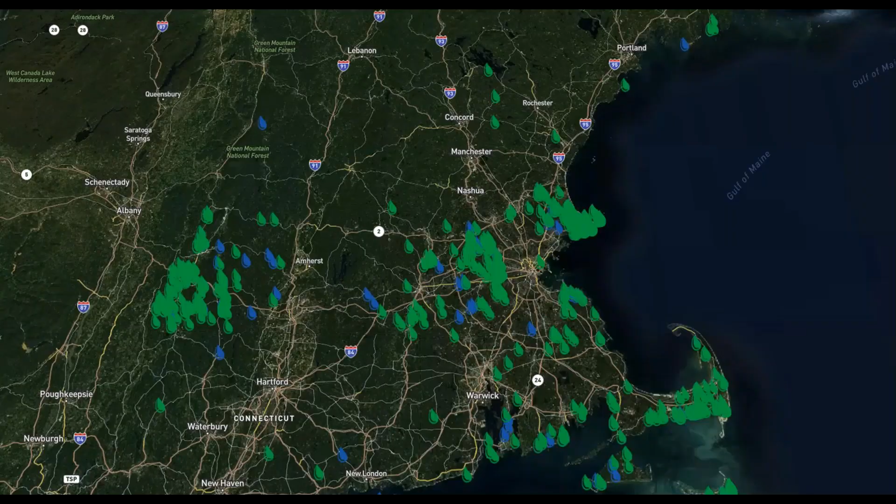On the map, let me go back for a second. If you click on one of those green dots, it'll bring you to these pages. You'll see a close-up of the site, and another box opens up that tells you when it was installed, the year, how many gallons per day it is, the level of effluent, and whether it's a primary effluent disposal system or has treatment, et cetera.

So it gives you a great snapshot of information if you'd like to learn about when these were installed, or if you'd like to look at other projects in Vermont, Massachusetts, or Maine. There are hundreds of them to look at and see why somebody may have chosen to use Perc-Rite there.

Let me talk to you about the history of Perc-Rite and how it came to be. In the 1970s, Middle Eastern countries had an issue with how to grow crops, since most of those countries are desert based. They worked through some things and came up with a process to pump treated wastewater from the cities, pipe it out to the desert, and irrigate crops through subsurface irrigation tubing. That's basically the genesis of how Perc-Rite came to be, using wastewater as a method of irrigation for agricultural purposes.

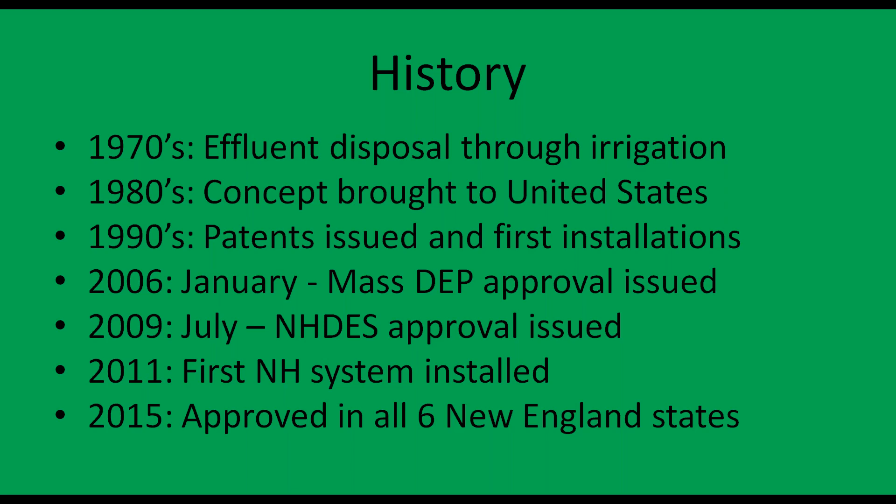Finally, the last state approval was issued in 2015, for the state of Connecticut, which has very, very different regulations than all of the other New England states. It seems like the other five New England states have more commonality, and Connecticut is a little bit different. So that took a little bit longer, and there's a lot more red tape for it to go through to issue that approval.

So the concept of Perc-Rite, we are equivalent to pressure distribution. So under your state code, whenever pressure distribution needs to be utilized, Perc-Rite can be an equivalent substitute. That's a very important concept to understand. We can discharge primary or treated effluent. It can be implemented for new construction or for failed systems, repairs, upgrades, etc.

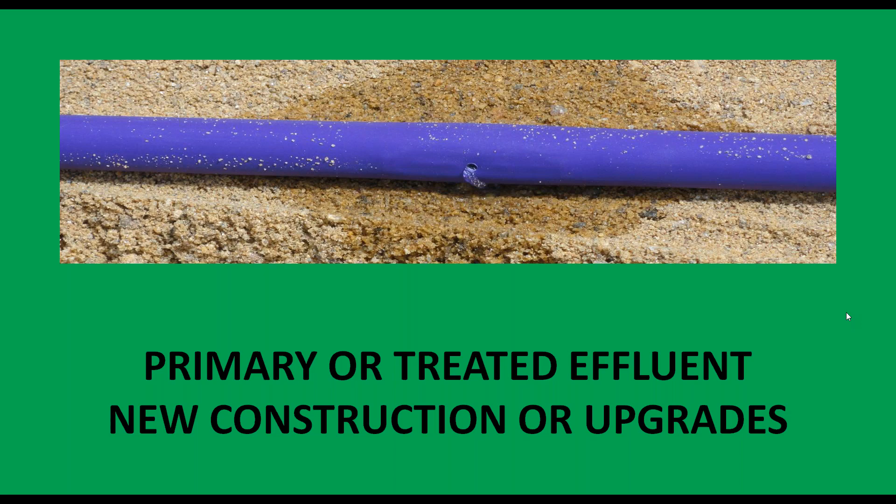Let's walk you through a plan view of this. So we have a home that's discharging waste into a primary tank. It can be either a septic tank or an aerobic treatment unit. It carries over into a separate pump chamber. In that pump chamber is a Perc-Rite supplied pump. It pumps through a force main into a device called a hydraulic unit.

We'll go over what that does more specifically throughout the presentation. The hydraulic unit is just a pass-through. So the pump is back here, and this provides some other aspects of our system. Once it passes through the hydraulic unit, through a zone supply force main, through a zone supply manifold, it feeds a series of interconnected pieces of drip dispersal tubing.

And then what's quite different is that we collect the wastewater through a return manifold, and it gets piped back to the hydraulic unit through a return force main. At that point in the hydraulic unit, it typically just deadheads, it stops there. So now the system is on, it's pumping and it's dripping. That collection point, it just stops.

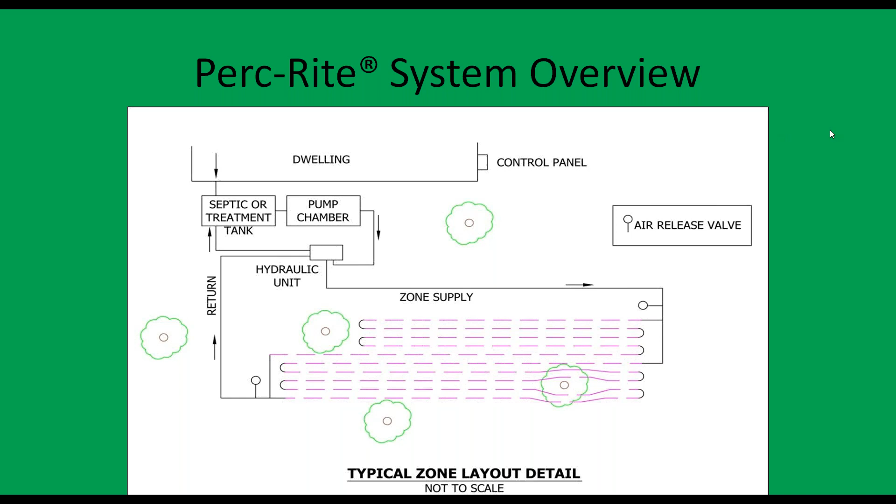So there's our septic tank or treatment tank, carries over to the pump chamber. We have the hydraulic unit. We have that force main that feeds the hydraulic unit through the Perc-Rite supplied pump. We have the supply force main and the supply manifold. We have the return line and the return manifold. We have the gravity return line that brings it back into the inlet of your primary tank. We have the control panel, which controls the whole operation.

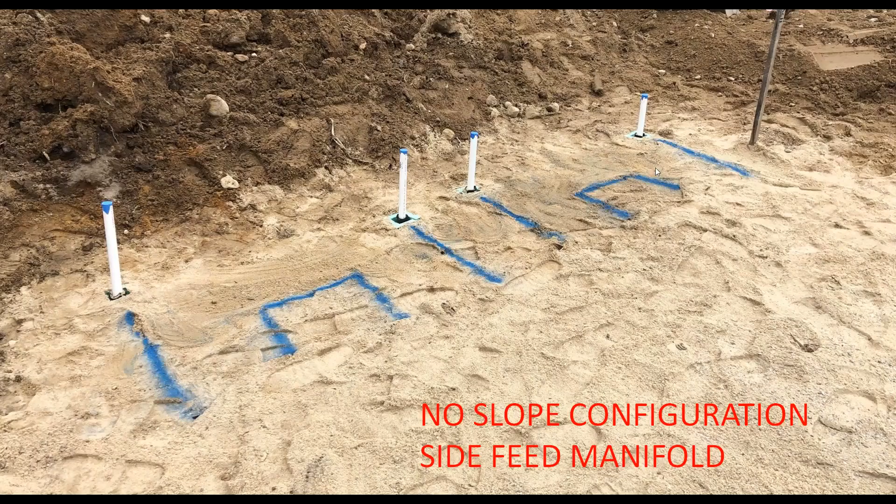In order to achieve balance throughout that zone of tubing, a manifold is built, as we showed in the depiction before. This type of manifold, which we call the side feed manifold, is very similar to your traditional pressure distribution type system. We'll have a force main below grade, horizontal pipes below frost depth that tee or elbow up and feed your lateral pipes. That's the same case here for Perc-Rite.

Flat sites will get this type of configuration. You'll notice we have an insulation barrier for our pipes that go up. That really helps protect the system for year-round operation, because these vertical risers will be charged. The drip tubing is not, so anything in this insulation box will be charged. When the system gets turned on, it's instantaneous pressurization.

These little painted-in sections represent the loop connections. Every line here, and there are 8 of them, will be a run of drip dispersal tubing. These are your loops. Because there's a supply and a return manifold, it'll alternate a supply feed here, a return here, a supply feed here, a return here. So it's broken up into two uniform laterals that provide a good pressure base into that tubing to keep it in the range specified.

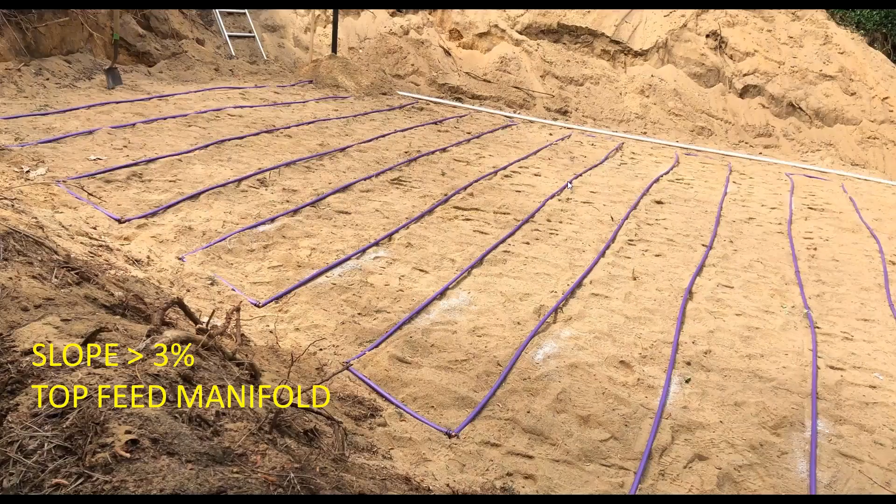What's really unique about Perc-Rite, and what helps us a lot on challenging sites, is the ability to build drip dispersal zones on quite steep slopes. There is no maximum slope for which the system will not operate. Some state codes set maximum slopes, saying you can't build on more than a 30% grade, or heavy equipment sometimes is difficult to operate on steep grades. But Perc-Rite can often be built on steep grades by hand, casting the material from below to make it work.

In this example, we have a pretty good slope. The pump chamber is further away at the toe of the slope. So you'd imagine the pressure closer to the pump, lower in elevation, would be greater than the pressure further away from the pump and higher in elevation. And of course, the answer is yes. But because of the pressure compensating emitters, the pressure up here may be 20 pounds and the pressure down here may be 40 pounds, yet you're getting the exact same application rate throughout the entire network of tubing.

Many of you design systems, I know we have a lot of designers because we did the poll. For those who have designed pressure distribution systems on a slope before, it is a nightmare. There'd be ball valves at each of the laterals, perhaps different orifice spacing and sizing, so your squirt test requires a lot of adjustments just to make it all work. Not with Perc-Rite, it's pre-engineered. The pressure compensating emitters take care of all that, and you get uniform application throughout the entire zone.

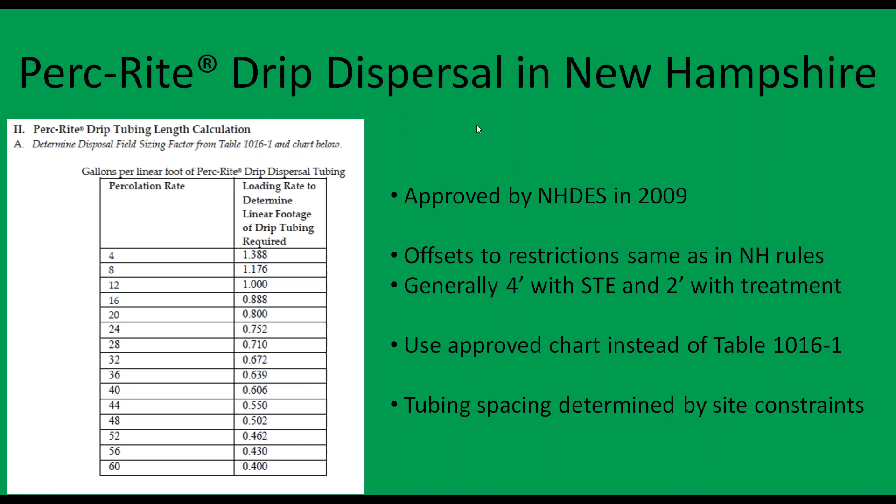So how to size the field. We are going to calculate the amount of tubing through that chart you just saw, and then we're going to figure out our installation method.

If you needed to use a sand bed, let's say there was unsuitable material or high groundwater forced you to be above grade, we can place the tubing 1 foot on center. So your linear foot to square foot ratio is 1:1. So if you needed 450 linear feet of drip dispersal tubing, you can build that in 450 square feet.

Now another example: let's say your groundwater was deep enough and your native soils were acceptable, so you didn't have to remove anything, but you wanted to work around trees, and your site was big enough that you didn't have to squeeze it into a minimal area. So maybe we put a piece of tubing on one side of a tree, go 2.5, 3 feet over, put another piece of tubing, then maybe go 1 foot for a couple of runs, working around a few trees. The overall result may be a footprint a little bit bigger than what the bare minimum under the code would require, but because we did not need to strip out material and import sand, it's okay.

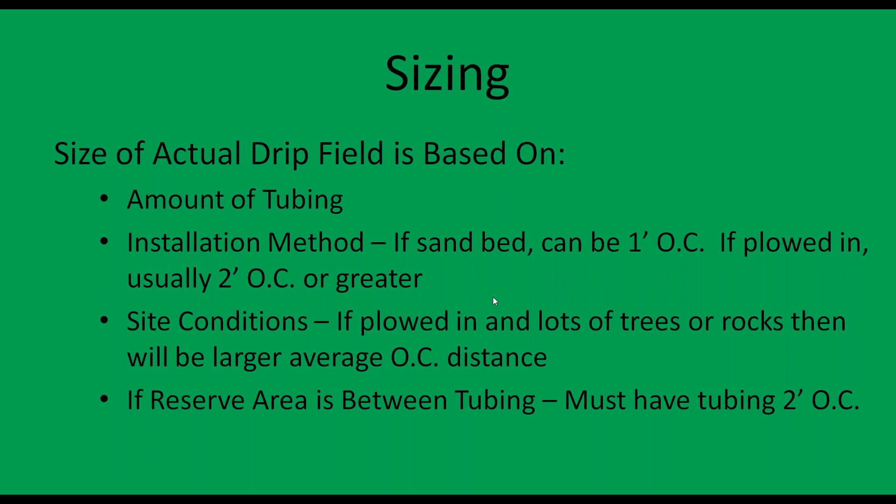So that is design criteria. We'll walk you through a real system later on, but we wanted to go a little bit more in depth about how this all comes together.

So a residential design, how do we help you? This is your first time considering using Perc-Rite Drip Dispersal, so how are you going to pull this off? Are you going to be a lone wolf, or are you going to have support? You're going to have as much support as you desire. As I mentioned, we have our New Hampshire design manual attached to this presentation. If you really want to read and learn about how to design a Perc-Rite system in detail, you can do so through the manual.

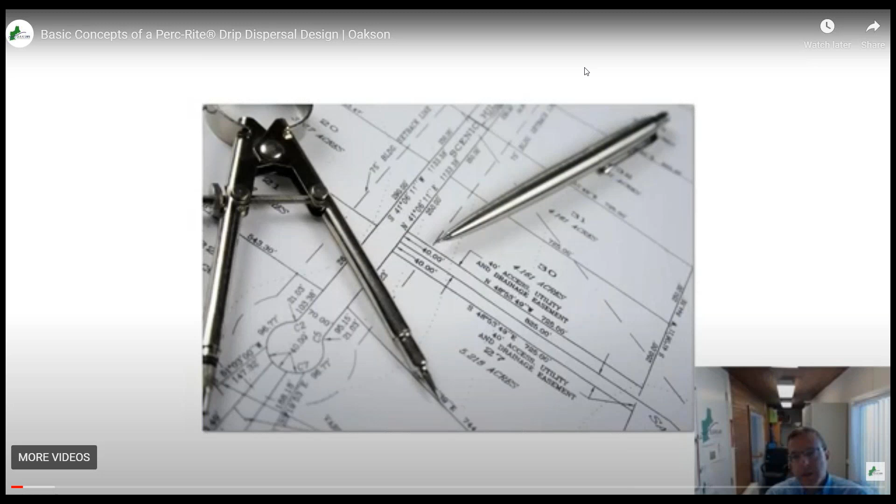But in today's world, YouTube is a great source to learn how to do things. I just fixed my clothes dryer last week—I couldn't get a repair guy out, so I said let me figure this out. I went on YouTube, found a video, and within 2 hours I was back in business. Same thing here: Oakson has a YouTube channel, and in that channel there are videos to teach you how to design a system in detail. So we'll walk you through the process. I'm a much better learner now through video than through reading lengthy technical manuals, so that's an option for you as well.

Coupled with those videos on our website and YouTube channel are all of the aspects of a design that you will need. I know some of you on this presentation work in Maine and Massachusetts - those manuals and approvals are on our website. There is a written installation guide, but there are better YouTube installation videos available, and I'll walk you through one of those later on. All of the AutoCAD details you would need to accompany your site plan are available, along with some in-depth questions that might help you get to solutions.

And then lastly, there is a design calculator tool - if you have a more typical rectangular shaped system, you can put in your length and width, and it'll spit out the exact manifold you will need to build the system. So there's a lot of resources available to you.

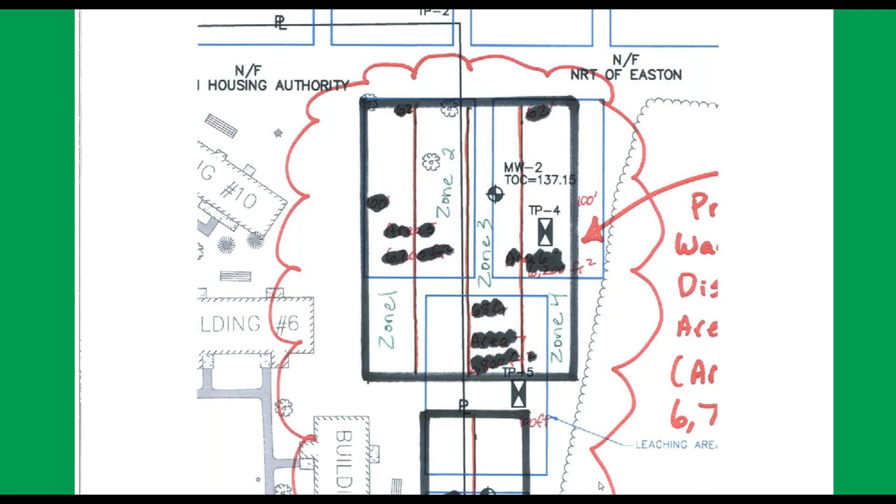But if you choose to forego all those resources and want to work with me directly for your design, please do so - I enjoy that interaction. So you might send me a somewhat crude sketch because you don't have a developed site plan yet, and say, 'Hey Rob, I got this area, it's about 375 square feet, we have a dwelling or a garage over here, we got this, we got that - what can we do there?'

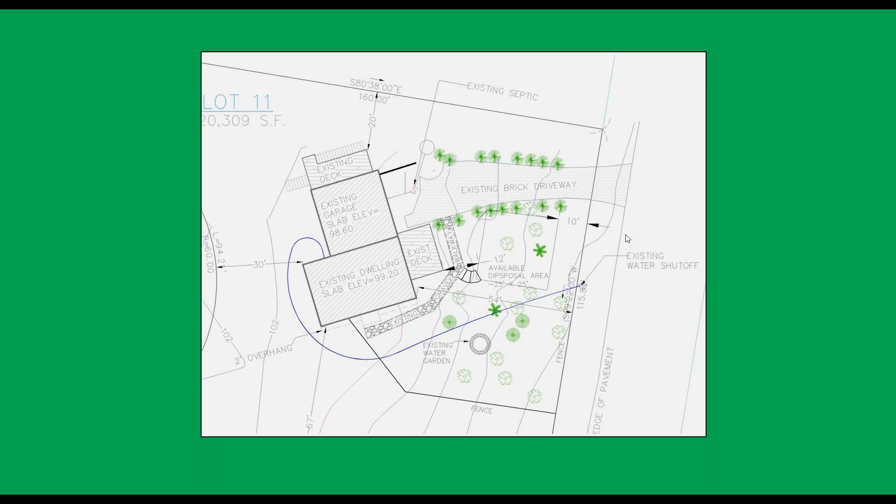Or maybe you have something a little more detailed: 'Rob, we have this house, a beautiful deck, a brick driveway, a lot of trees, a nice walkway. We have to stay away from this water line. I only have this very small area. There are some trees we want to keep, there is some slope - what can we do? Is Perc-Rite a possibility here?' And I'll work with you during those circumstances.

But what I found is the best way - if you're a little further along, maybe you've worked on another solution on a site, and that solution is causing you heartburn because it isn't going to look good, or it's going to be really expensive because you need a huge retaining wall - is to send me existing conditions, your design calculations, your plan intent, things you've already worked on, plus some tank locations and a potential field layout. I can work with you and give you back an exact Perc-Rite layout for those circumstances.

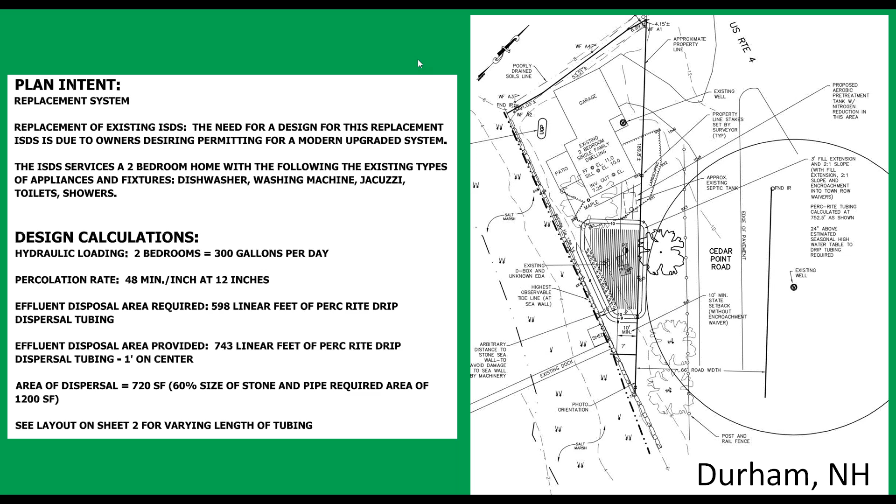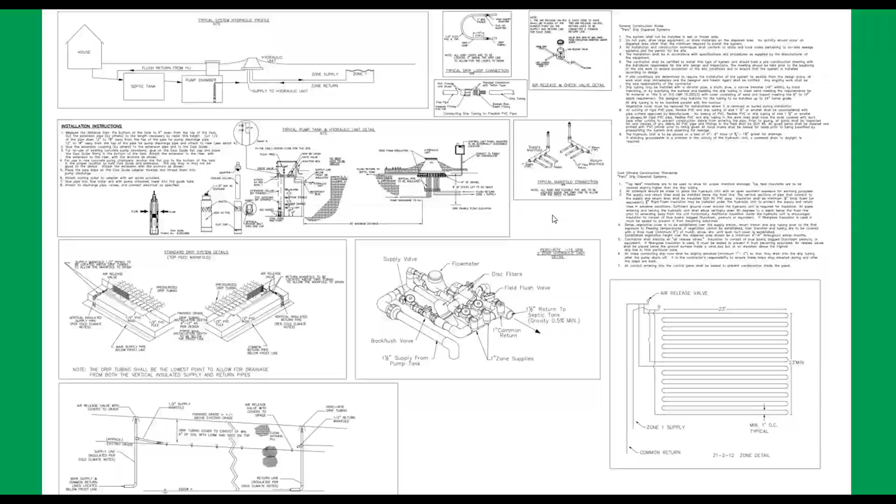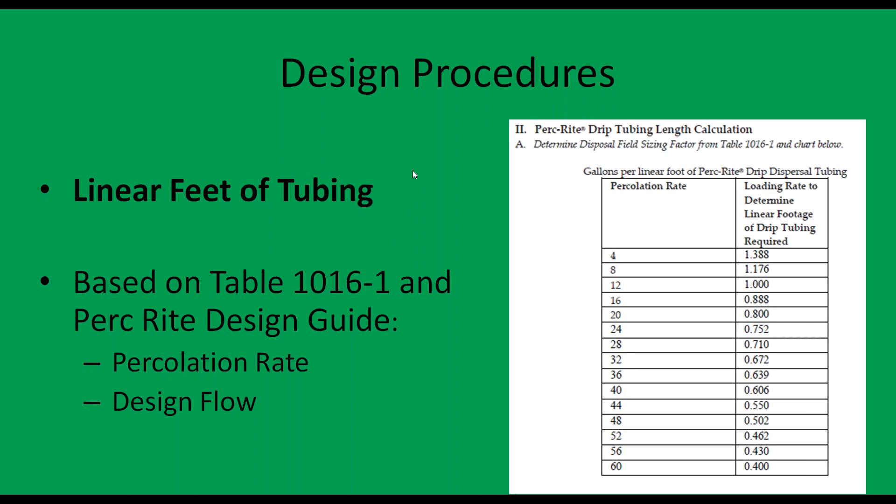So let's talk about some of the design criteria. Here is our chart - we are calculating linear feet of tubing, not area, based on your perc rate and your design flow. Just plug it into this chart and it'll give you a multiplier in order to come up with that linear feet of tubing. That is pretty much what we're going to talk about for design - this is only a 2-hour presentation, so I can't go into too much detail, otherwise we won't be able to touch all of the topics.

So a good question just came in about design. Talking about perc tests, if the tubing is only 8 inches in the ground, then where do you do your perc test? Great question.

The answer is that when you're designing a system, you need to design it based on the most restrictive layer. If your most restrictive layer is deeper down and you want to do your perc test, say in the C layer, while the A and B layers are less restrictive, then with Perc-Rite you'd be able to maintain that and do it shallow. If your A and B layer is more restrictive, you need to be a little more creative—you may have a shallow perc test, or you may be perking through a couple of different layers, and you'd need to work through that with your regulatory official. It's a little unique in that aspect.

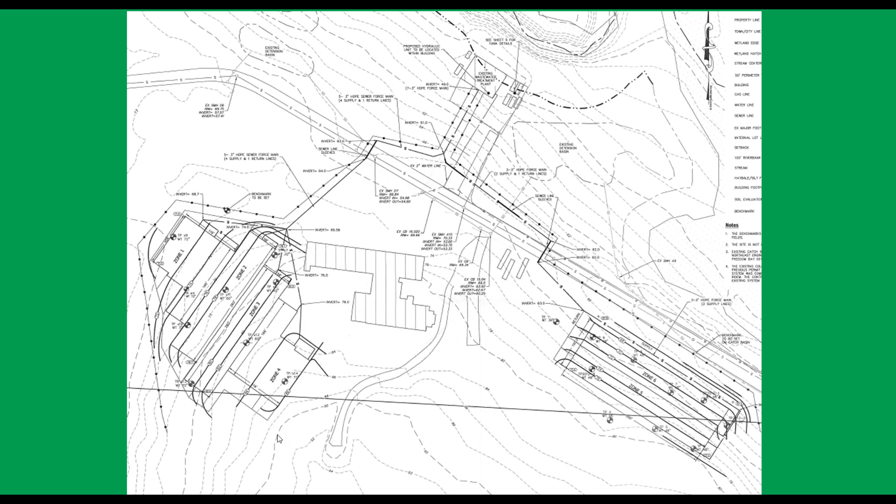Here's an example of a large residential subdivision in Rhode Island where they had a treatment plant and pockets of good soils throughout the site. You see a lot of jogs here, because they were avoiding bad pockets of soil. So we had a very unique zone layout—not a problem, because we'll provide all the custom details needed for your site.

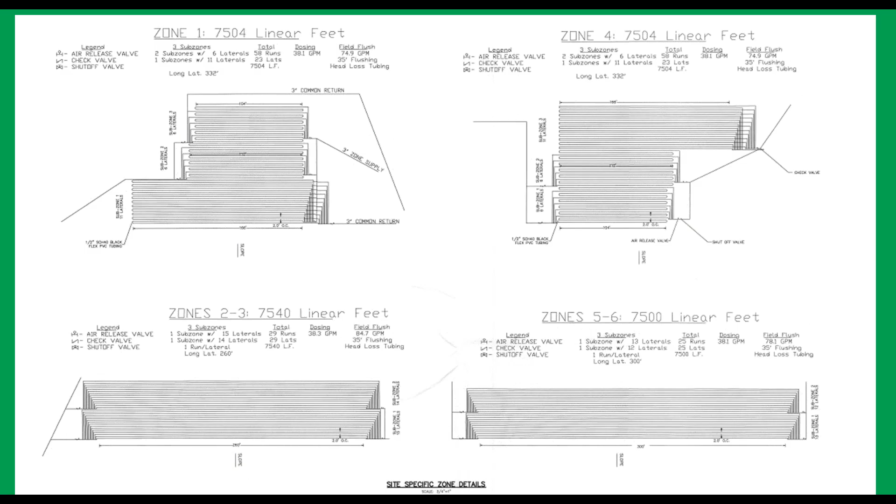Anything you need as an engineer, we will work and give to you. Most importantly, with these details, you'll need to size your pump and force main—we're going to give you all that information: the zone layouts, what your pump needs to be, how many runs in a zone, the force main size, how many minutes per day the system needs to run, all of the factors.

This is just one little snippet of a 5-page report we're going to give you that shows how we came up with our design. You can make sure our math is correct, but you don't have to go through that process—we'll give it to you. We'll give you the answers to the test, and then you can just read through the questions and make sure you agree with our answers.

If you're a regulator—and there weren't any on today—this is important to know: there may be a regulator who has no idea what Perc-Rite is. So as a designer turning in a plan to somebody who says, 'what is this, I don't even know what to do here'—not a problem. Encourage your regulators to reach out to us, and we can provide them all the information they need to review their plan.

We can also review it with them. I've been known, pre-COVID, to go to offices and sit down, roll out the plans, and walk them through the approvals, show them everything, and make sure they're comfortable. We've been to meetings before. We do a lot to make sure everybody is comfortable and understands how the technology works, and that it really is just a more protective, pressure distribution type system.

It's important to differentiate roles. What does Oakson do for every installation project, and what does the site contractor do? Oakson works with the site contractor to plan things out. We review plans with them and provide a list of parts that we supply, like I talked about during the rendering.

We also give them a list of items they need to supply, basically the Schedule 40 pipe. We'll even give them takeoffs of that so they have a good understanding and don't have to think it through too much. We give them the electrical schematics for the project, and links to our YouTube channel so they can watch an actual installation in depth. They'll feel a lot more comfortable after watching the video than trying to figure it out from the plan, believe me.

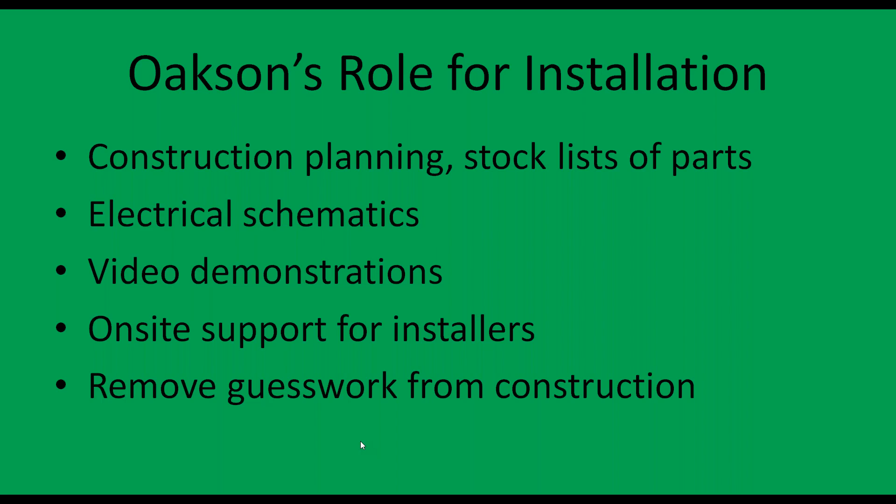We provide a technician to go to every single one of our installations, so there will be an Oakson technician present during installation of our components. The goal is to remove the guesswork from the construction process. We want the contractor to be confident in the bid they put out, and confident that when we say we can build this in less than one day, as long as they follow our lead, that will hold true.

The contractor will supply and install all the tanks, as I mentioned already. They're going to prepare the drip dispersal area. If it's a sand bed, they'll do the excavation and scarifying and bring in the sand bed, raked out and ready to go before we arrive. If it's a plowed-in installation, they might flag or stake the area, or paint contour lines to get ready.

They'll provide all the pipe and work alongside us. Oakson is not the contractor of record, we do not pull permits, but we work alongside the contractor. What I say is, we're in the same trench as the contractor installing our components.

The contractor is responsible for securing an electrician, whether it's their own person or someone the homeowner wants to use, and having them ready for the day of installation. The contractor is also responsible for backfilling all components following the given procedures, and for working with the engineer and homeowner to ensure compliance documents are taken care of. Oakson doesn't deal directly with compliance documents other than issuing a letter of certification.

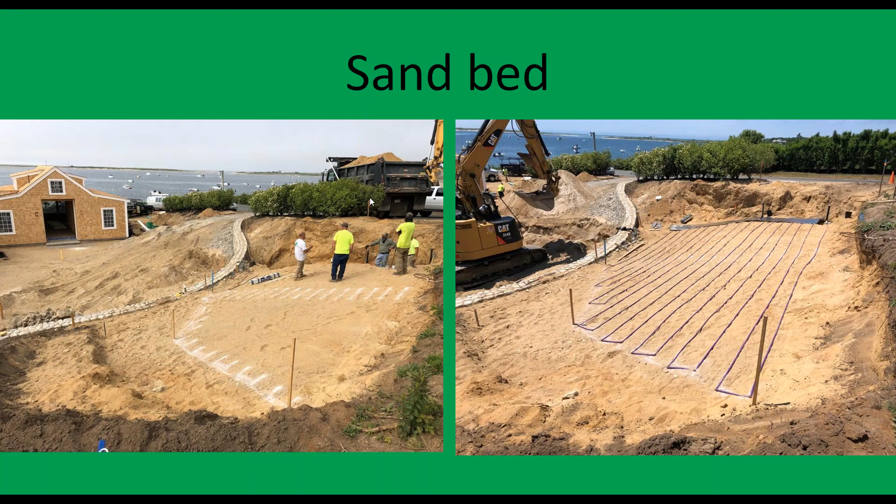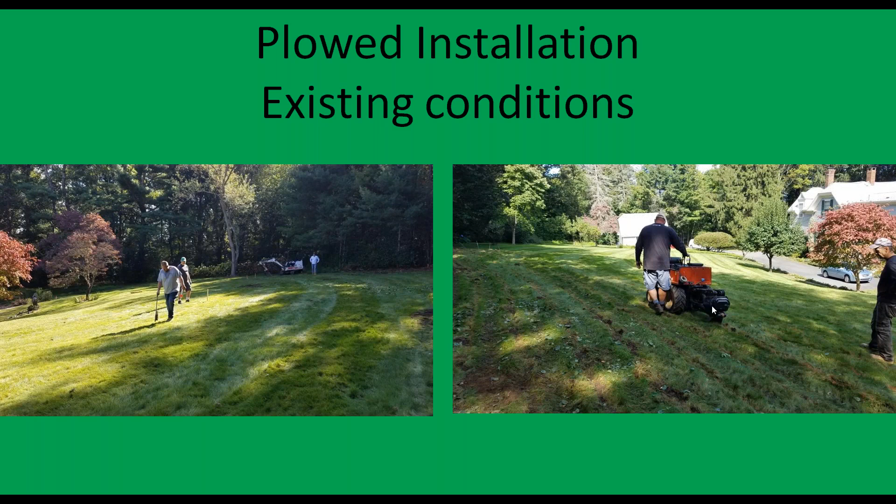So the contractor had his laser level and walked along, and every place he heard a beep, he made a little paint mark, then went back and painted the lines through. You can see some of the lines here to the right in the machine plowing the drip dispersal tubing into the existing grade. At the far end, the little pigtails of tubing are sticking out. We'll see some better pictures later on, but the operator is following the contour, pulling the tubing in at the desired depth that was specified on the site plan.

So we've come up with a process where the tubing elevation is specified on the plan, and then additional sand, say 6 inches, a sand blanket or sand envelope, is put over that elevation. So your tubing elevation is 100, the sand blanket is 100.5. Now that ditch witch can pull the tubing in at a depth of 6 inches below grade, and all the tubing is covered. Now a skid steer or track machine can drive over the sand and spread the topsoil very efficiently. I'm not worried about the load over the tubing.

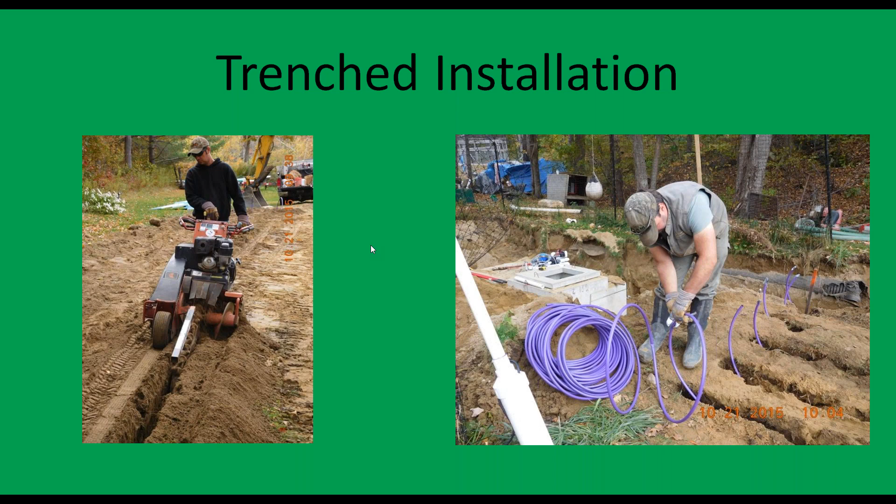The last example is the most unique and, to be honest, the most time consuming. You have a homeowner who does not want to lose a single sapling, move a rock, move a semi-mature tree, or move a tree that's kind of falling down a little bit, although this last run of tubing won't impact it. So they hired the contractor to hand trench with narrow shovels, just wide enough, going around all the obstacles, and then lay the tubing in these trenches.

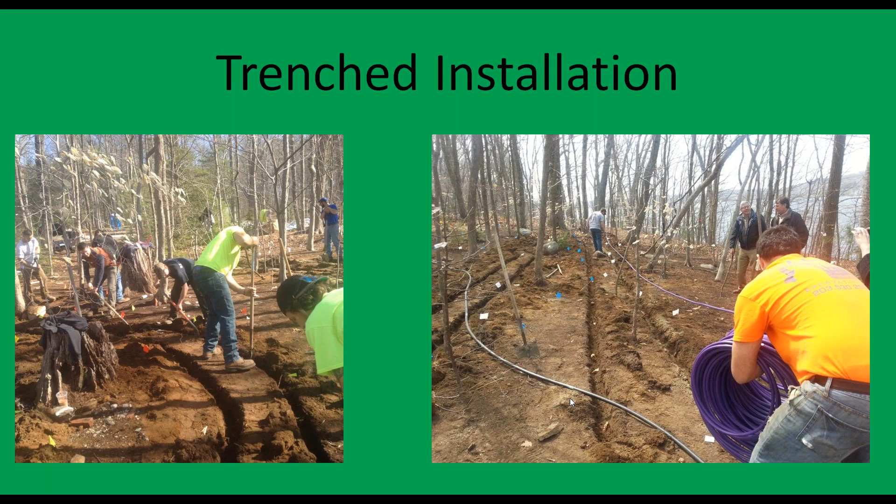It's very labor intensive, but the result is you have all of the leaf litter that they blew off to get started. Hand trenched, put the tubing in, raked the material over, made all the manifold connections, blew the leaves back, and you would never know a wastewater system is installed at this property.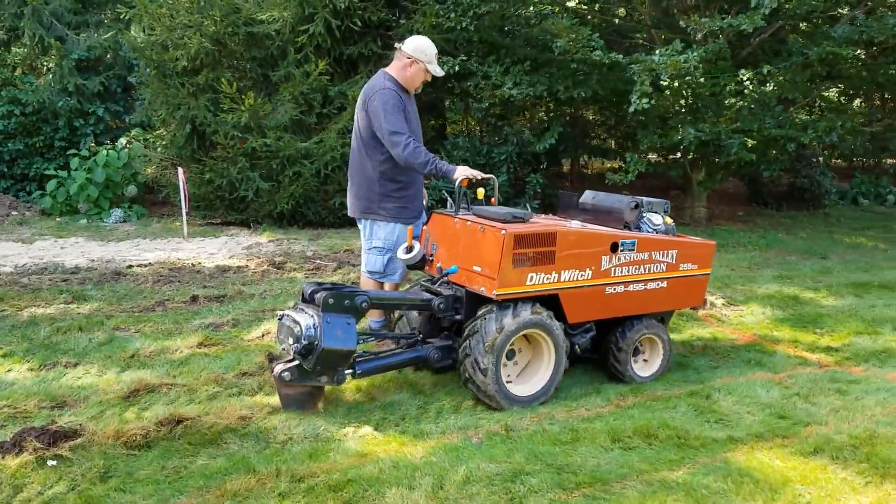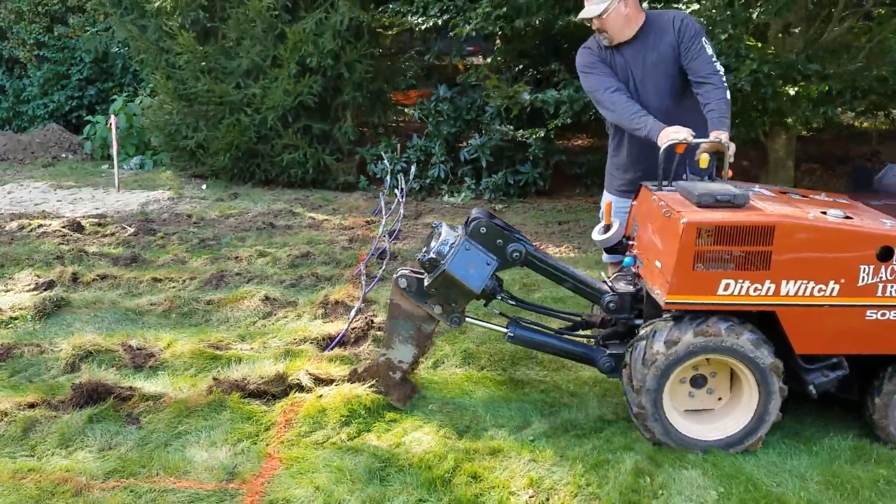Here's that same site where we're pulling the tubing into the lawn. You can see the paint marks for the next runs that the contractor painted out. Here's the operator getting to the end of the line. He's going to bring the blade up, cut off the end, and you'll have the pigtail there. They'll be looped together later on and connected into the manifolds.

Here is an example of the tubing being pulled in for a large commercial system. You can faintly see a string line along the track, which allows the installer to pull it straight. As they get to the end, the string line's connected to the stake, and then they just move the string to the next stake and pull the next line.

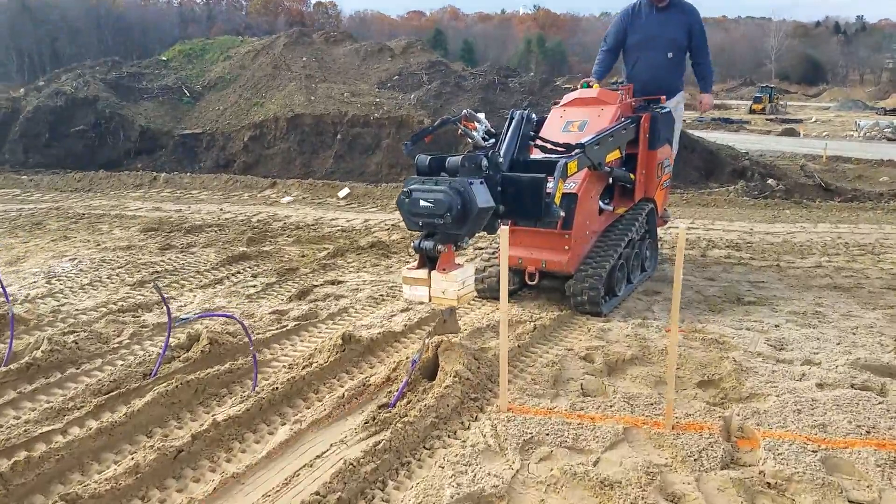A lot of these videos are sped up so we're not sitting here for 10 minutes watching it plod along, but you get the idea. He reaches the end, cuts it out, and then you're all set.

Here is an installation video captured by a drone. Again, we're speeding up the video so you don't have to endure many minutes of this monotony. The contractor makes it to the end, pulls up, cuts the line, then drives off and goes back to the other end. As he's driving off, you can see the guys over to the left. They're moving the stakes, moving the string, and the one guy on his knees is actually making the loop connection as everything gets set up.

This was a system of 6,000 gallons per day for a residential cluster. All of the tubing and all of the loop connections were pulled in and done in 5 hours with basically 3 or 4 guys — really quick, really efficient. So here they are connecting again to the coil of tubing and starting the process again.

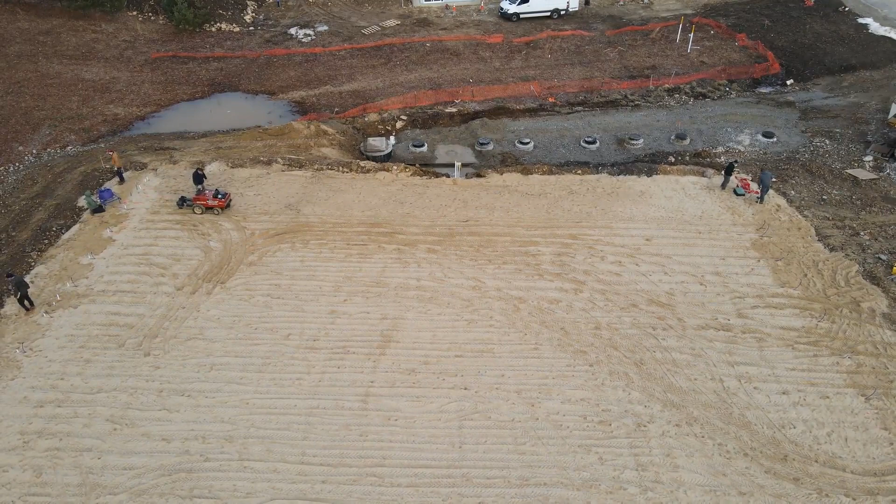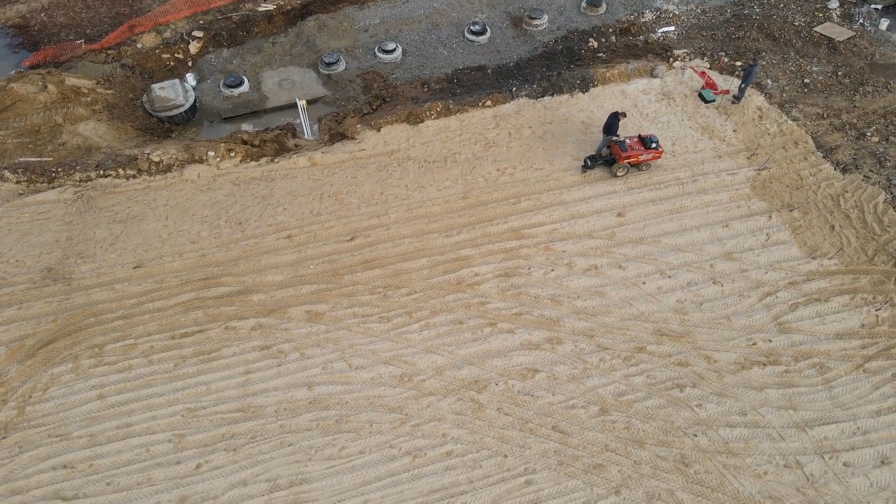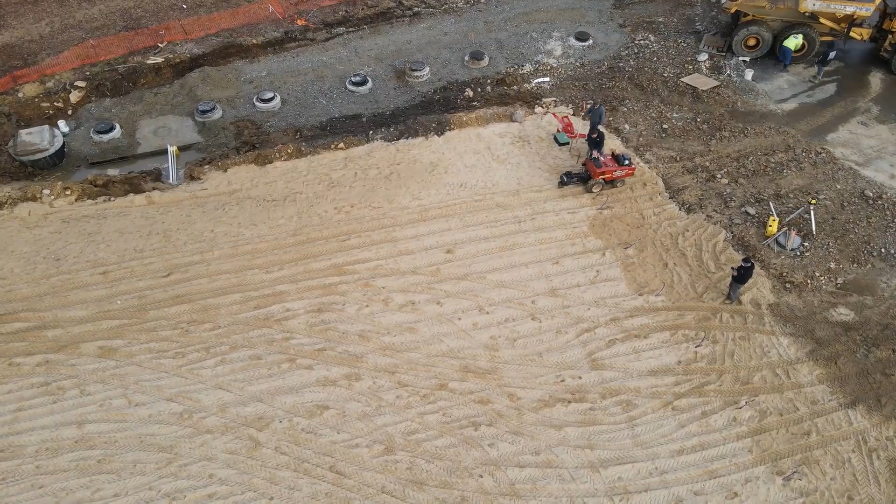This company pulling in the tubing is an irrigation company we've worked with on probably 20 jobs. They're not part of Oakson, but they're often used as a subcontractor on a lot of jobs. The installation contractor thinks, why should I rent a machine and struggle through it when I can get a fixed, very reasonable price and have it pulled in with certainty? So that's what's going on here. Here we are at the end of the line again, and that is the end of this video.

The next video I'd like to show you is an installation from a couple of weeks ago, just a quick snapshot.

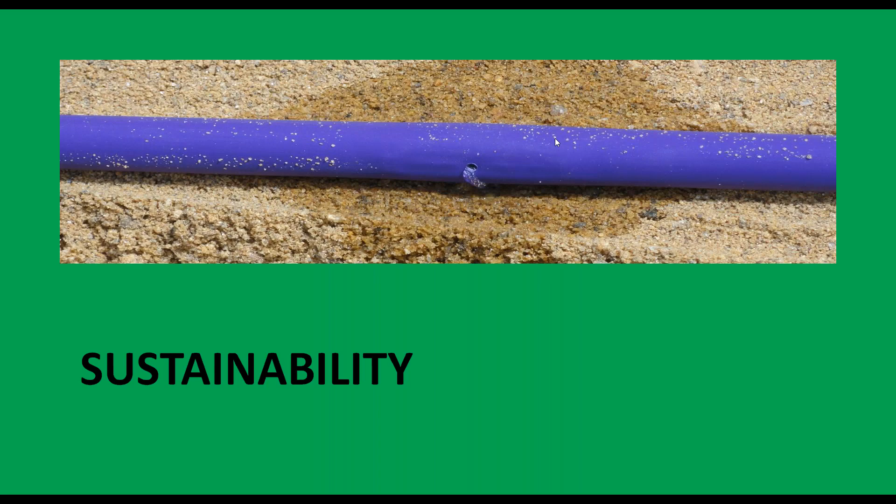All right, sustainability. The very first Perc-Rite systems were installed in 1990, and about 4 or 5 years ago, American Manufacturing, the company that built the system, went back to some of their first installations and told the homeowners they'd be interested in seeing what it looked like underground. They exhumed part of the system, cut out some of the tubing, put in fresh tubing, looked at the soil, and took soil samples.

What they found is that because the tubing is installed in the upper soils in an oxygen-rich environment, there is no biomat forming. Biomat forms because of anaerobic conditions, but since it's installed in the upper soils, the bacteria and microbes living there don't produce that gelatinous layer that creates biomat. So the soil was in excellent shape 25, 27 years later.

Now, of course, there's a pump, floats, and little valves, and those have a lifespan. But we've seen systems installed since 2006 in Massachusetts still running with the same pump. So we can say with certainty that the drip field, because it's flushed out and installed in the upper soils, is going to last a lifetime. The other components, if you get 12 to 15 years out of them, I'd be proud to say we consider that all very durable.

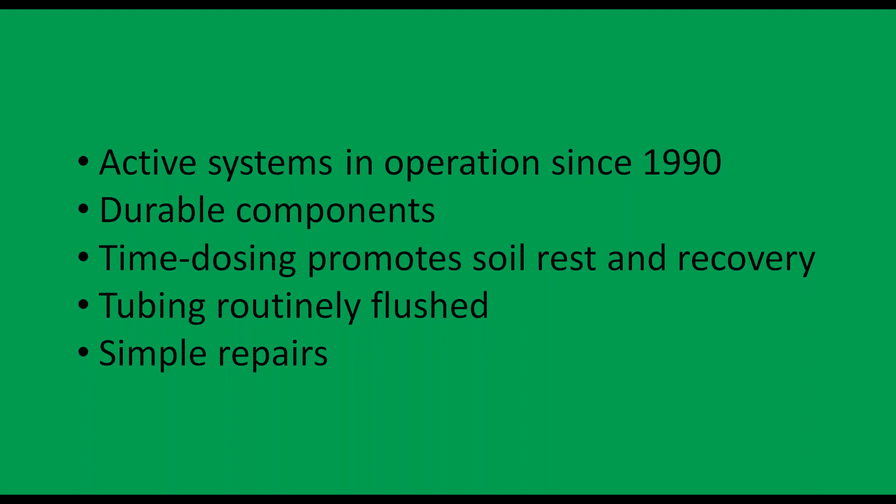A note about simple repairs: if you have a shallow, buried piece of drip dispersal tubing, and later on, say you're pitching a tent in your side yard and accidentally drive a stake through the tubing, it's very easily fixed. Just a couple of barb connections, dig down, and fix it. Your maintenance provider can do it in 10 minutes. It's very easy and not cost prohibitive when things like that happen.

For operation and maintenance, the recommended schedule is an annual visit for our equipment. If the system is partnered with a treatment system that requires more maintenance than once a year, it's okay to just kick the tires on our stuff too—it only takes a few minutes to take a look at everything. But for just the Perc-Rite components themselves, once per year is more than enough to confirm everything is working well.

For large systems, we provide a custom O&M plan. Depending on the number of zones, the gallons per day, the strength of effluent, and the type of treatment that may come before it, we'll come up with a plan including frequency and inspection points—all the things you need for your large system.

Lastly, when Oakson first came to be in 2004 and our systems were being built in 2006, we did the maintenance ourselves. What we learned quickly is that you're either a maintenance company or you're not—you're not a part-time maintenance company. Being set up to have multiple service trucks, 24-hour coverage, and cover a territory like we do just wasn't feasible to provide the level of support we wanted to give our customers.

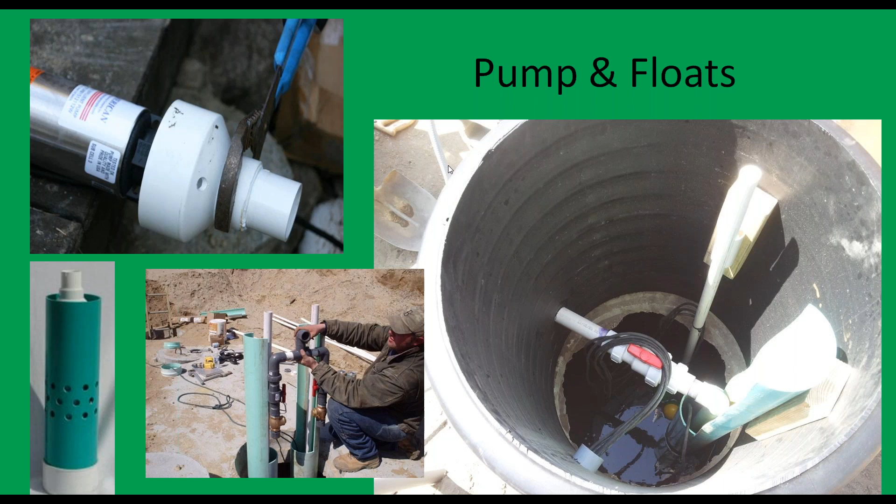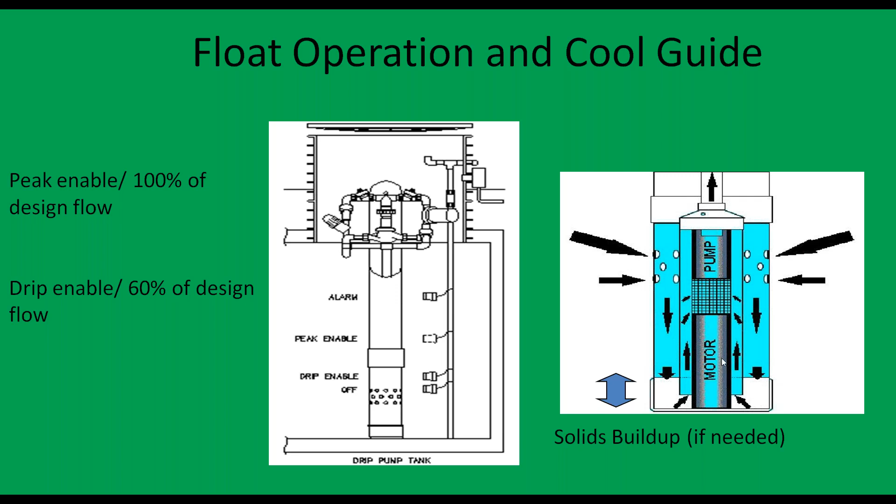This is what that Cool Guide looks like. We have the device that we provided, and it goes all the way up into the riser of the system. The way it works is the water is drawn in over in the middle, at the intake, and is forced down over the motor and up into the intake. So it actually cools the motor as it works. That's why they last a long time.

Every one of our hydraulic units has a flow meter as part of it. The flow meter provides a great diagnostic tool. For that uniform application, that pump curve you saw for the emitters, we know precisely: if you have 400 feet of drip tubing installed in your project, there will be 200 emitters because they're spaced every 2 feet on center. 200 emitters at 0.61 gallons per hour, divided by 60 to get into gallons per minute, would be 2.0 gallons per minute.

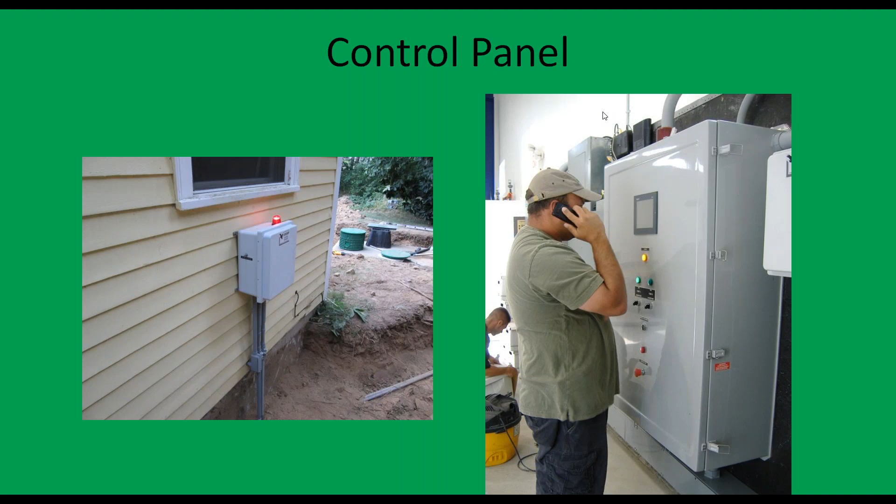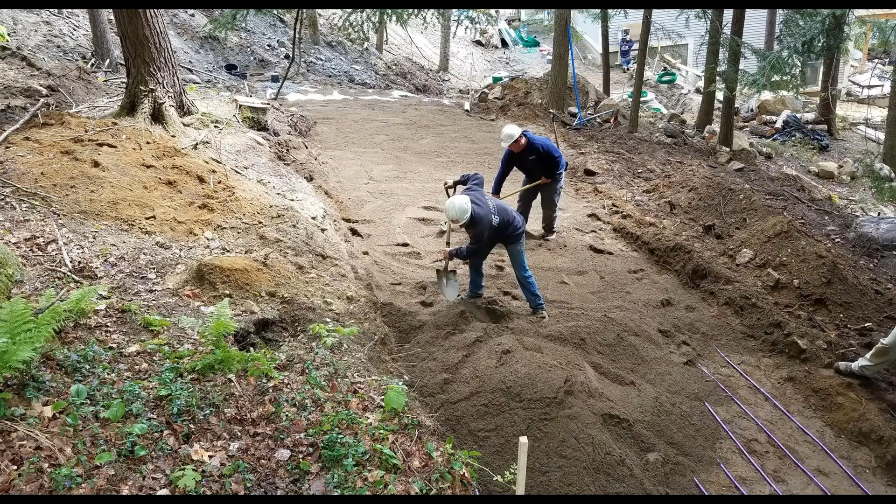All right, what are some of the advantages of choosing to use a Perc-Rite drip dispersal system? Working with slopes. We talked about the benefit of not having to design a pressure distribution system on a hillside. You can see all the way down here near the house, you have the tanks, you have the control panel being wired, quite a lift in distance.

So working with a slope, we didn't have to make this a flat field. We didn't have to clear any downslope trees. This particular site, it was better for them to clear these trees than to work around it, just because of the nature of the slope and the depth they chose to install the system.

But you can see here that the final elevation of the system is going to be the exact same as the existing grade. Now, quite a nice turnout there. And that's because the tubing follows the offset of your limiting factor, and then you just need to grade over it and hold up your slopes. You don't need to build a wall here and make this flat. Otherwise, you'd have a lot more material.

So because the tubing can be 6 inches below finished grade, we provide you the lowest profile option of any wastewater system.

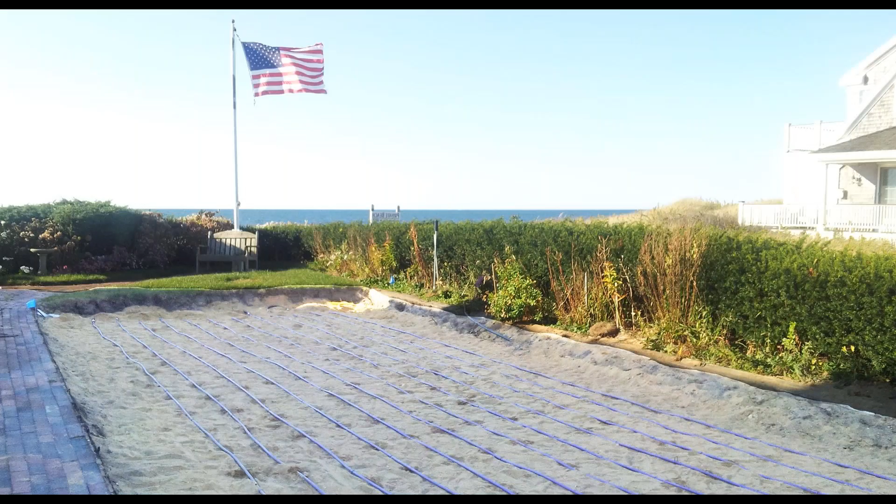So in this particular example, you have a failed system that was right here, okay? So the contractor removed all the failed system and material. If any other system were built here, this side walkway, you'd have to walk up over a big mound, and you wouldn't have the access to the limited yard that you had to begin with.

Not to mention this being a waterfront property. So all of these coupled together, when you have a finished grade of 6 inches, the walkway will be at the same elevation as the final grade of your wastewater system.

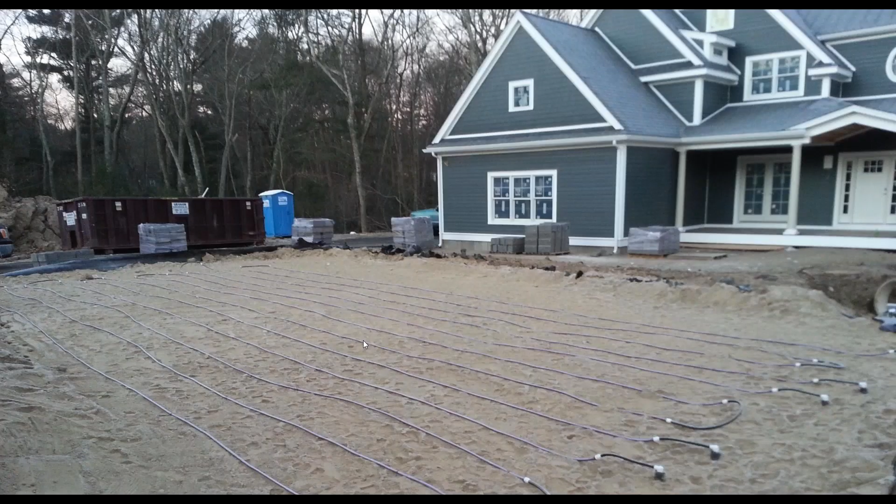This is a new construction situation. If they chose to use something else, you'd have to raise this much higher, which in turn would have raised the walkway, the entrance, and then likely the whole house would have had to be lifted onto a higher foundation.

Maybe you would have had a restriction on your height to build. So by keeping your wastewater system lower profile, you can have the whole building as low as possible and not be impacted for your height to build.

I challenge you to design a PD system in 5 minutes with this configuration. But with Perc-Rite, it worked out quite easily and nicely.

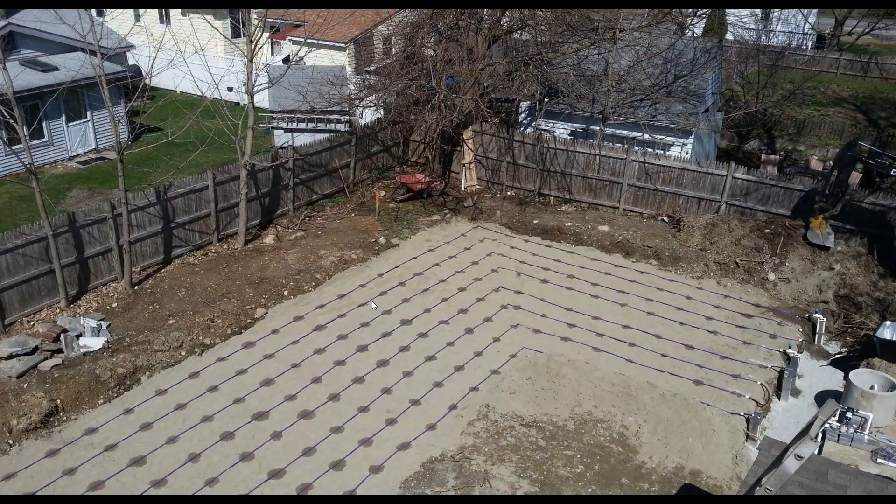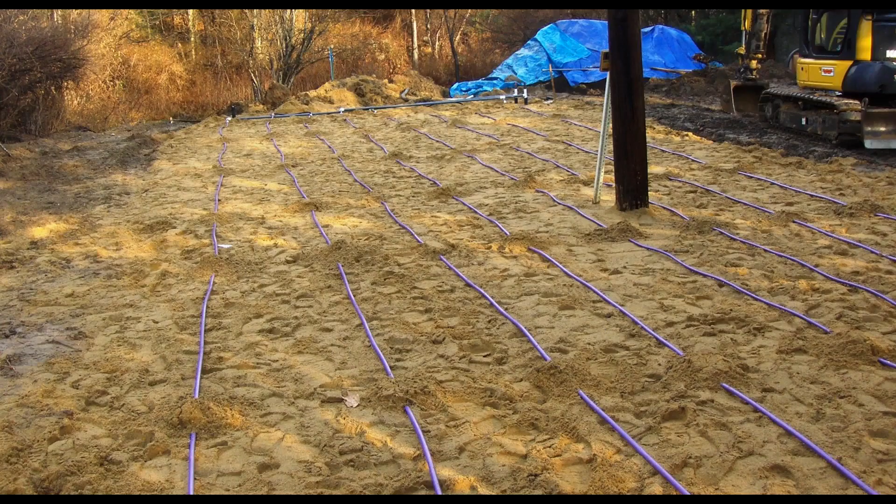So we wanted to show you some real extreme examples we can provide. Here's a simple utility pole, an electric pole in the side yard. Rather than paying the electric company to move it, we can just go around it and not worry about it.

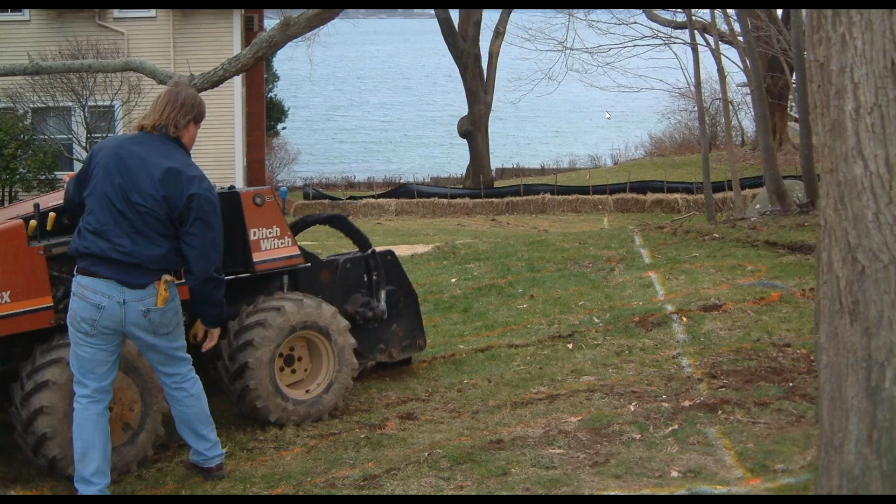Here's another waterfront example where they pulled in the tubing with a vibratory plow—no mound, no fill, no excavation. And if you think about it, despite having the barrier down below, there's really no erosion concern. You're not worried about any washout going down into the water because of the method of installation.

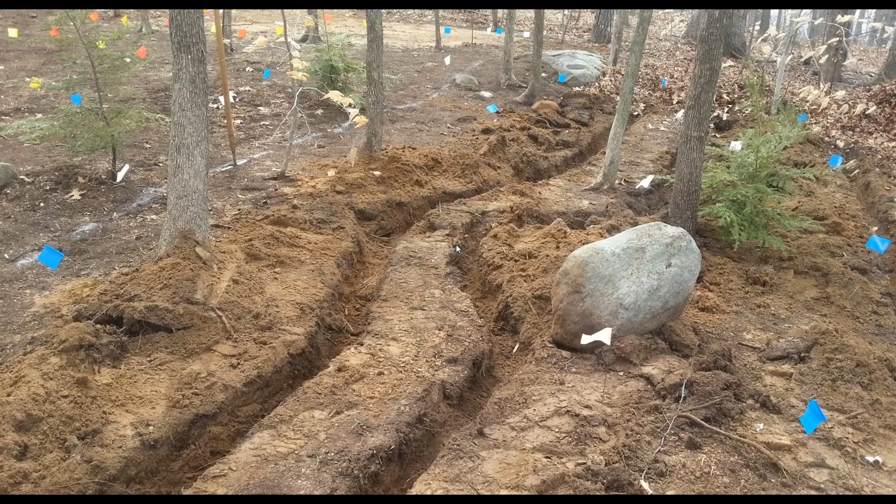Here's another close-up of that unique application we talked about earlier—that sacred rock they decided to go around. Just that little narrow trench, preserving every little root and everything in the area.

A question just came in: how is the area calculated from the edge of tubing or whatnot? Actually, the tubing has a maximum of 1 foot on either side of it deemed effective leaching area. So if you're placing it on a bed spaced at 1 foot on center, you'd have 6 inches to one side to the edge of bed. It's basically whatever the spacing is—if it's 1 foot on center, you have 6 inches to the edge of the bed; if it's 2 feet on center, you'd have about 1 foot to the edge. Good question.

So I want to talk to you about hydraulic failure. We have a time dose system, programmed to run only enough minutes in the day to discharge the design flow specified on your approved plan. So how does that prevent hydraulic failure? I think we can all agree the number one reason for septic system failure is overloading it—and it's not overloading from use. It's not that kids or people are over-showering or doing more laundry than before. The reality is our plumbing fixtures provide lower flow than ever before. So why do we have failure?

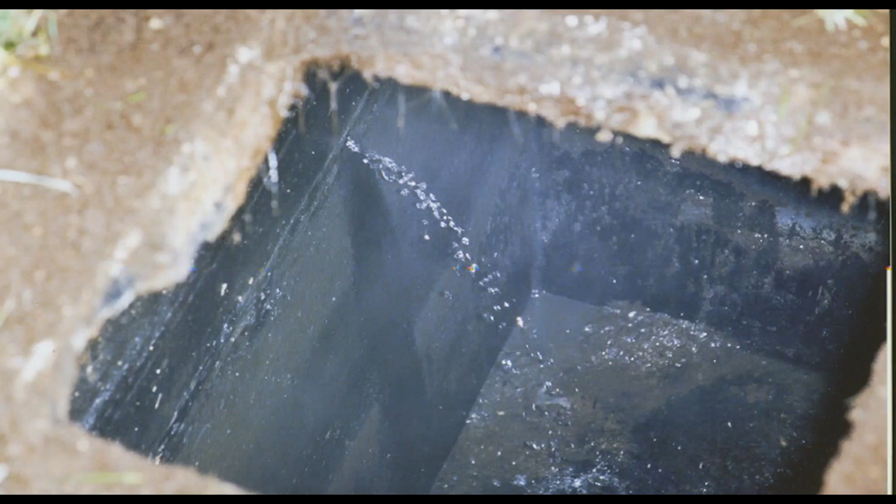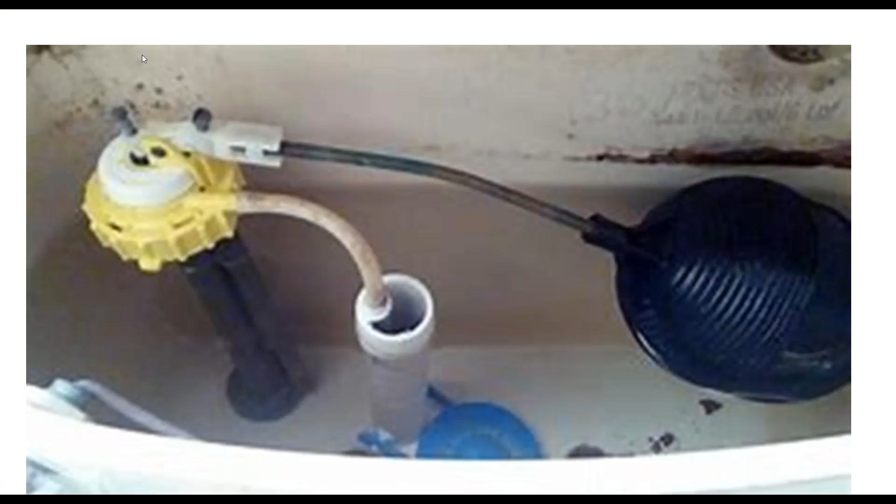Well, you have a bad seam in your septic tank, or a bad collection system that's taking in water. Or the biggest culprit—you have leaky toilets that are just pouring water into your wastewater system all the time.

So how does Perc-Rite deal with that? Well, we deal with that by not discharging anything over the design flow. We have that flow meter, so we know the exact flow rate. We're only going to pump, say, 2 gallons per minute for 300 gallons per day. We're going to tell the system to pump 150 minutes per day over 24 hours.

If you are bringing in rainwater every time it rains because your pipe inlet is leaky, that tank's going to fill up and the alarm's going to go off, despite the system still running at its 300 gallon per day timer setting that it needs.

So what's going to happen? I'll tell you what's going to happen. You're going to have a homeowner who paid for a new wastewater system that got an alarm the first time it rained, and they're going to be very angry. I've gotten many phone calls from that, but usually what starts as an angry phone call results in a very happy homeowner, because they replaced a system that failed due to hydraulic failure, and they don't want to do it again. So we caught that problem.

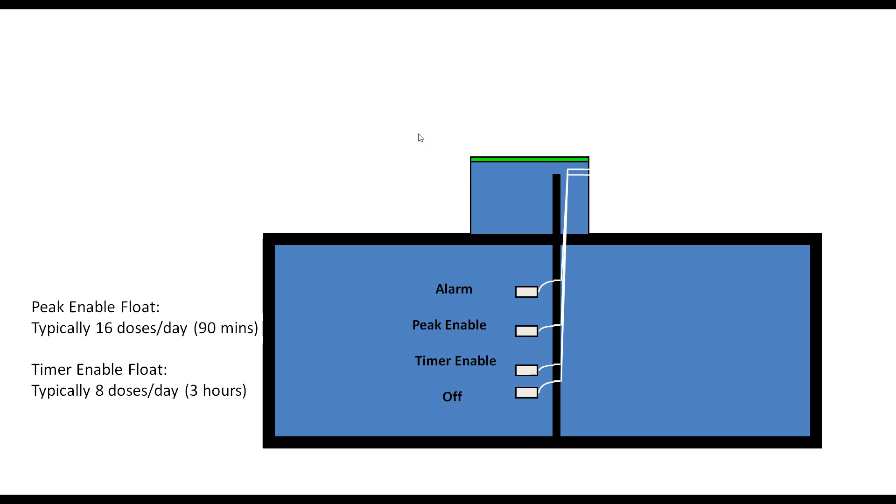So now the contractor came back, saw the weeping coming into the tank, sealed the tank better, and now we don't have that problem anymore. That is how Perc-Rite is going to prevent hydraulic failure on your designs.

We have four New Hampshire project examples that I'm very proud of, so let me walk you through them a little bit more closely as we get to the end of our presentation.

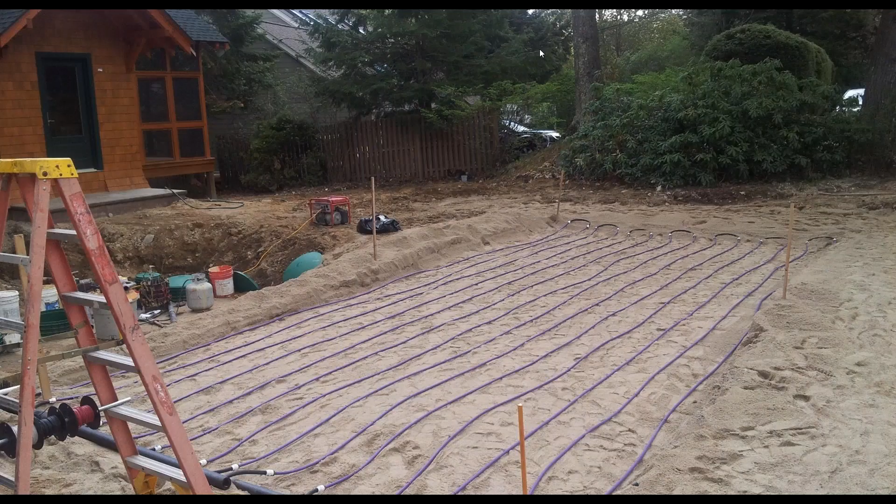There's one on Lake Winnipesaukee in Alton, so you can see it right here. Here is the installation contractor installing the hydraulic unit. They have the pump, getting ready to wire everything. You have the manifolds going over to the already installed drip dispersal tubing, with the drip dispersal tubing at the other end. This is in the front yard, the house, and the backyard is Winnipesaukee. If you choose that little droplet on our website's interactive map, you can zoom right in and see all the criteria.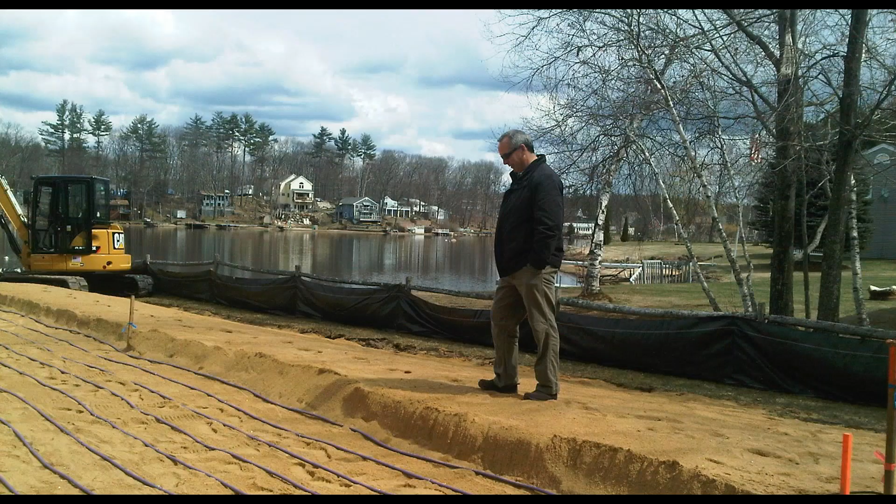Sleepy Hollow Lane in Epsom, so you can see this here. There is the New Hampshire DES representative inspecting the system. You can see it's right on the lake.

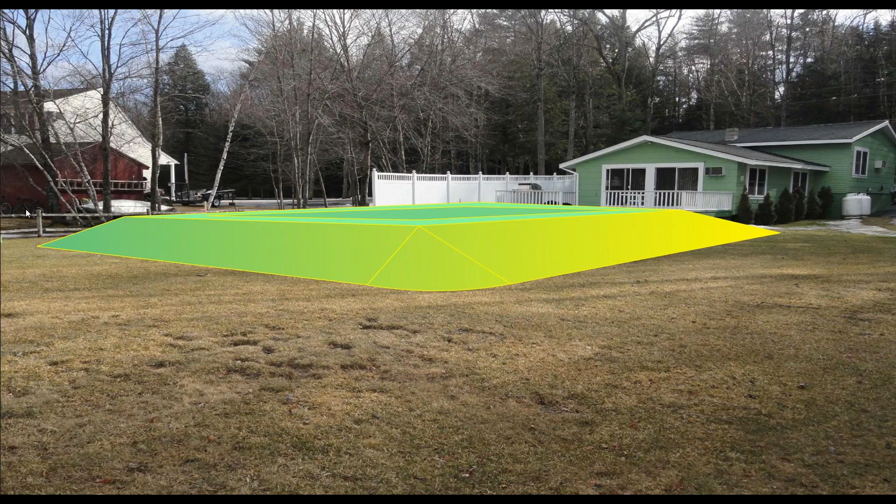What was interesting is the designer of this system proposed a Presby system that was going to stick out of the ground. The homeowner said, no way, I do not want a big elephant buried in my yard. I'm going to lose my deck, and I'm going to have to climb over it to get to the rowboat on the lake. No way, find something else.

So in Barnstead, this is Upper Suncook Pond here. Very interesting site - this has been in the family for like 50 years, and they really wanted to bring it to the point where all the grandkids, and there were many of them, could use this for years and years without impacting the lake.

There's been a lot of algae growth in the lake as a result of cottages that were only seasonal that are now turned into those micro mansions, and all of the waste that used to be in little 30-gallon drums is now leaking into the lake.

So this homeowner was awesome. He was an engineer in Boston and said, you know what, I want to take the lead here on the lake. I want to provide a solution that's going to allow my grandkids and my neighbors' grandkids to enjoy this lake and swim there, long after I'm gone.

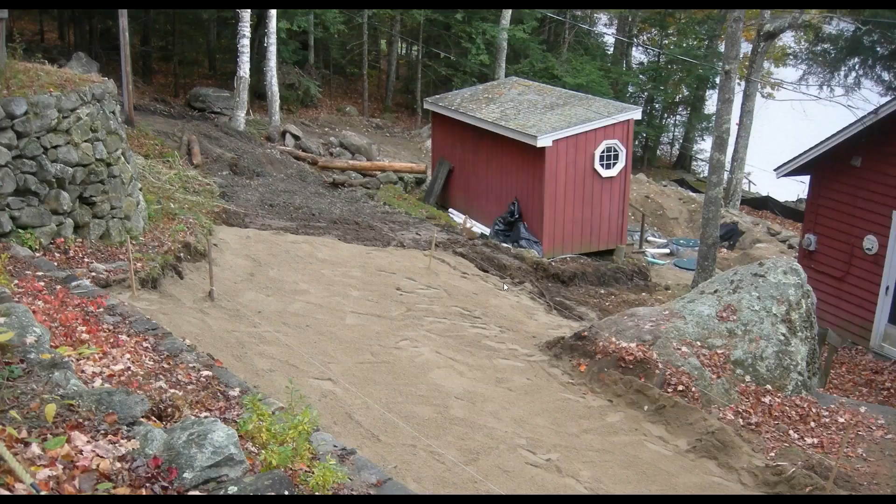So he worked and designed a treatment system with a Perc-Rite system. It didn't have a lot of room, so this whole area had to be tanks. And then you can see the tanks down here from the other perspective.

And then there's this massive piece of outcrop that they wanted to keep, because when a grandchild was brought into this world, they always would put him or her there and took a picture of them from this perspective. So that was important to keep.

So what a beautiful, beautiful result for this homeowner who really cared about the environment, cared about his family, and came up with a solution. And hopefully, a lot of the neighbors are actually starting to implement this and protect the lake.

So what are some trends in growth for Perc-Rite in New England? The growth is in the municipal large flow applications. So the first example I want to share with you is Bonnie Eagle High School in Standish, Maine.

This is an existing high school that has an overboard discharge permit into the Saco River, with peak flows of about 22,000 gallons per day when school is in session. So as you can imagine, dealing with a school and peak flows is very challenging from a treatment standpoint, managing the ups and downs and maintaining the levels.

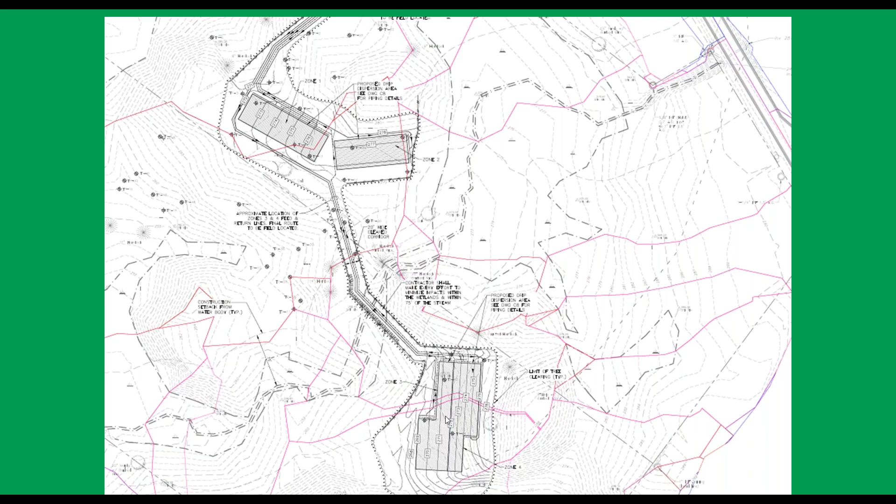Here is the site plan. You can see the force mains coming down. The plant is kind of off the map here. And then we have a series of zones at all different elevations, so we're following the contour. And we have different irregular shaped zones as well.

We provided the engineer all the zone layouts that they needed, and provided the friction loss calculations that they confirmed, to make sure the proper size force mains and pump were selected.

I actually have a video of this from my drone, the last time I was there, that I flew over the site, that I'll post on my YouTube channel so you guys can see it.

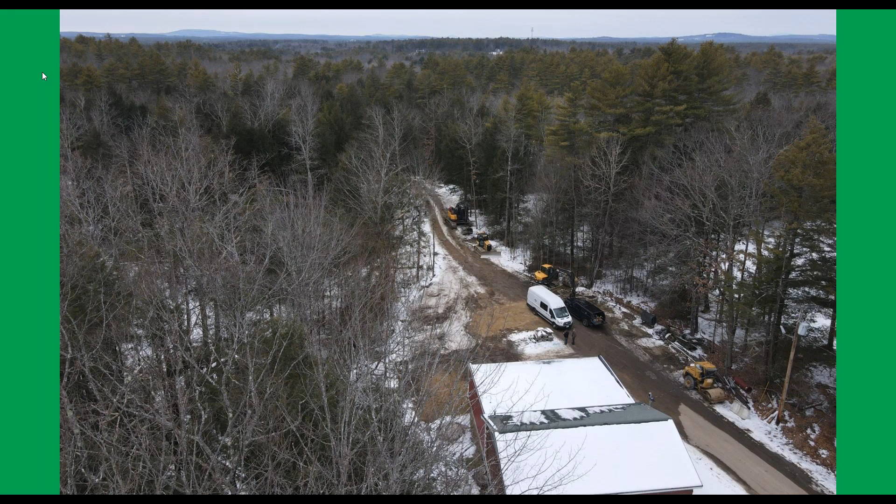That's a really cool site. The next project I'd like to talk about is Bromley Mountain, located in Peru, Vermont. They are looking to add 80,000 gallons per day of peak flows, building more rental units and housing so they can attract people to spend the weekend and lodge up there.

In order for them to do that, they had to go through a quite unique experience. Where they want to propose the development, there's basically a brook downslope from the development that dumps into a water supply. So the environmental concern here is very high.

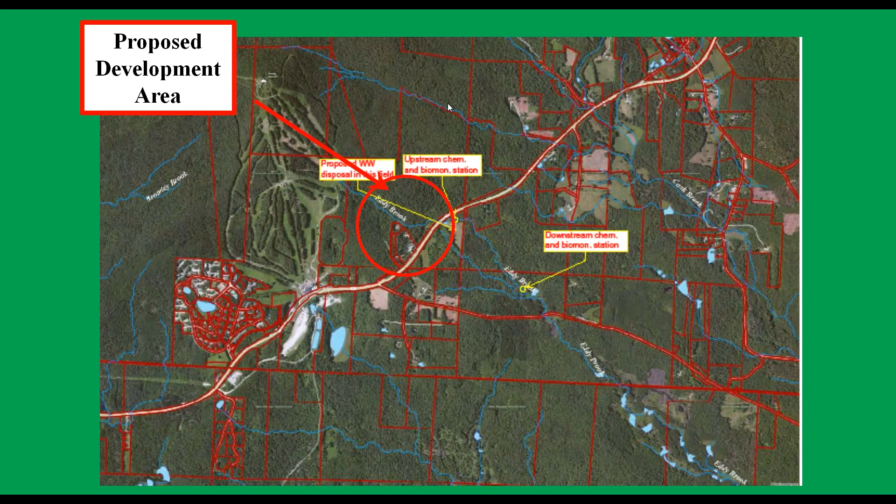So the state of Vermont DEC required a phosphorus study to make sure there was going to be no phosphorus impact into this brook and therefore carried into the water supply. So we built a temporary Perc-Rite system.

They built a lagoon and trucked wastewater from their plant up the road into the lagoon, and we pumped it into the exact location they proposed for the 80,000 gallon per day system. So we replicated the loading rate that was proposed for 80,000 gallons per day, which would take up a lot more of this area. And there were downhill and uphill monitoring wells so we could measure the impact of the phosphorus.

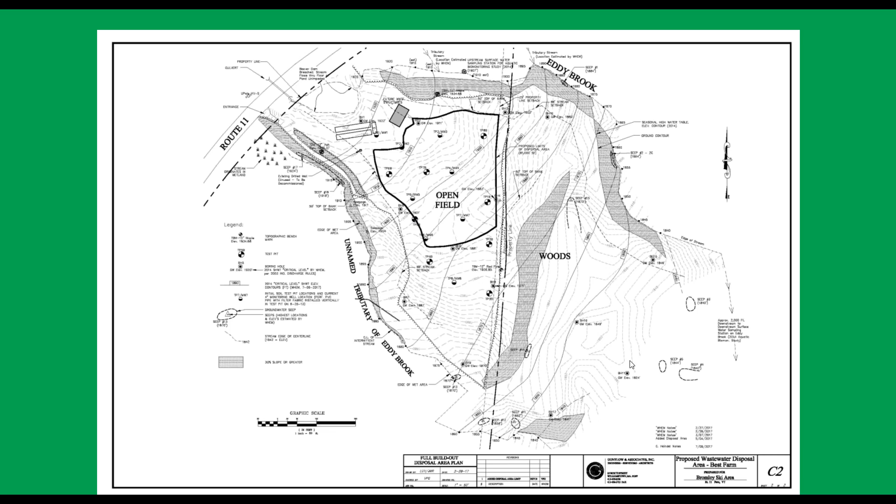Here is what the site looks like. So here's that road, this is where we tested some of it. This is the open field where they need to build all of the drip dispersal zones, and these are the zones that were laid out in the zone configuration.

What's important here is that the state acknowledged that the Perc-Rite test system removed all of the phosphorus. There was zero impact of phosphorus, zero non-detect in the monitoring wells, so they issued a permit for 80,000 gallons per day. Because of COVID, the project wasn't able to get started, but it's going to start in 2021, so keep an eye out for updates. We'll be posting videos and information because it's quite interesting based on the nutrient loading impact and decision making on why they went with Perc-Rite on this site.

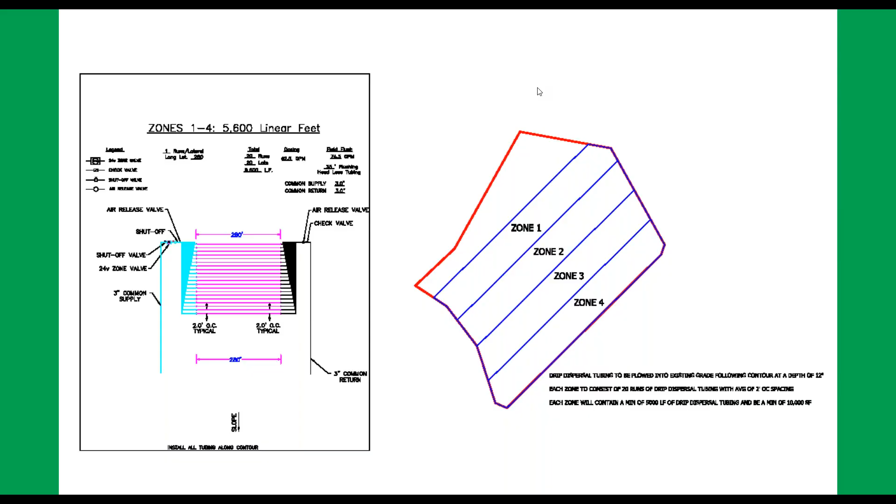In the last project I want to talk about, the town of Bridgton, Maine is building a Perc-Rite system that will have peak flows of 160,000 gallons per day. As you can imagine, building treatment plants for entire municipalities is very, very expensive.

So what Maine decided to do is build a smaller package plant and redirect flows from their downtown area into this plant, discharging it into an unused, sloping, wooded parcel of land that was acquired for a very reasonable cost.

We started working on this project in 2015. It was permitted in 2020, and we are starting construction in 2021.

Here is the mini treatment plant, and it's pumping up into this wooded site of four very large zones. This is like a 100 scale, so these zones are very, very big. You can see them here in more detail. This is the treatment plant, this is our hydraulic unit, lift pumps, zone valves, all of the things needed to have a successful project.

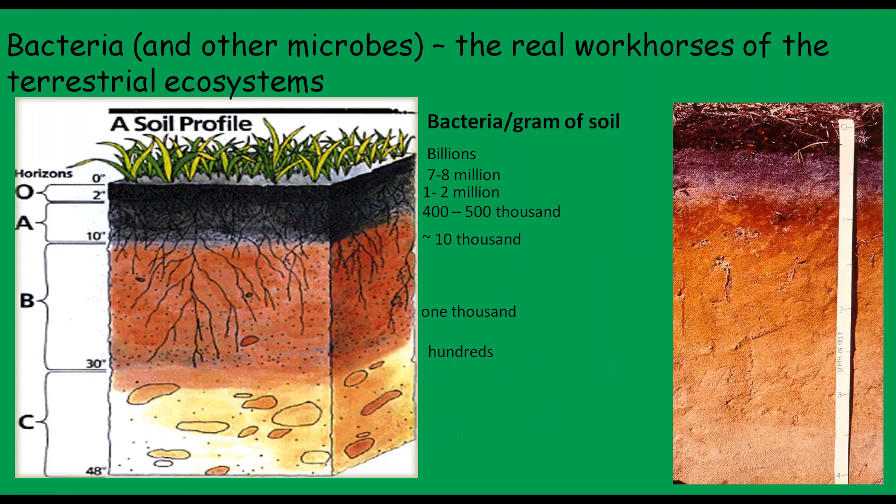So I wanted to thank you, but before I thank you, we have a few more minutes, and I thought we might have been under time, so I have a couple of things I wanted to show you. Let me walk you through one more site. This is kind of my backup plan, just in case things run a little ahead of schedule. So I'll close with this.

Oakson started in the early 2000s. Perc-Rite was first installed in Massachusetts in 2006, New Hampshire in 2011. So our first system was 2006.

We got a call right when the lockdown occurred in March of 2020 from a nice homeowner who said, hey, I just bought this house last year, and because of COVID I live in New York City, and this was kind of like a little weekend summer getaway, but I've decided to bring my family here and quarantine here. Two weeks in, I got this alarm on the control panel on the side of my house.

So I opened up the control panel and saw a sticker, American Manufacturing. I contacted them, and they said, oh, Oakson is the company that can help you in New England. So the guy called Oakson.

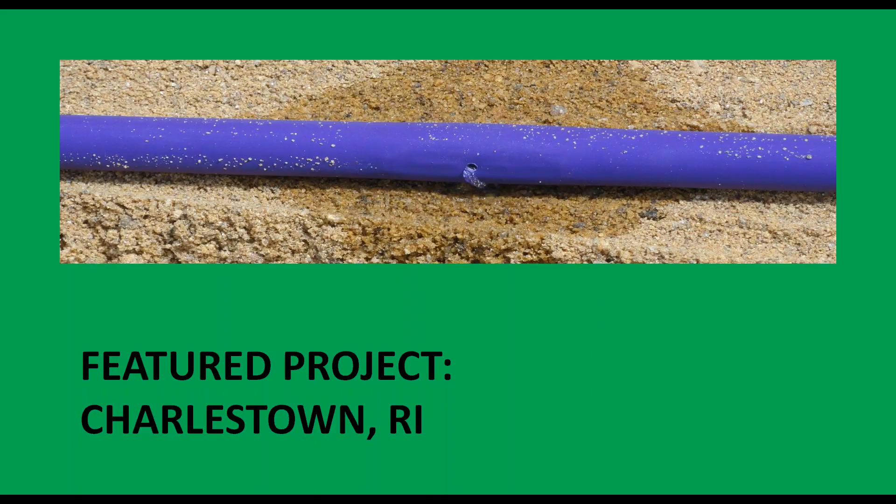Charlestown, Rhode Island is located on the Long Island Sound, very close to Mystic, Connecticut, but it's also very close in proximity to the University of Rhode Island.

Some of you folks may know that the University of Rhode Island has an academic center for wastewater, for those who are looking to get into the health agent or environmental health field.

In that demonstration center, they have a lot of treatment systems set up above ground, so you can see what they look like and how they work. You can see chambers, and all these different things.

The university owned 56 Thomas Street in 1998. The professor contacted American Manufacturing because they learned about Perc-Rite Drip Dispersal and asked if they would donate one for academic purposes. American said sure. So they shipped the Perc-Rite system to URI, and URI built it at 56 Thomas Street in Charlestown, Rhode Island.

After a couple of years of demonstration, the university decided to sell this house.

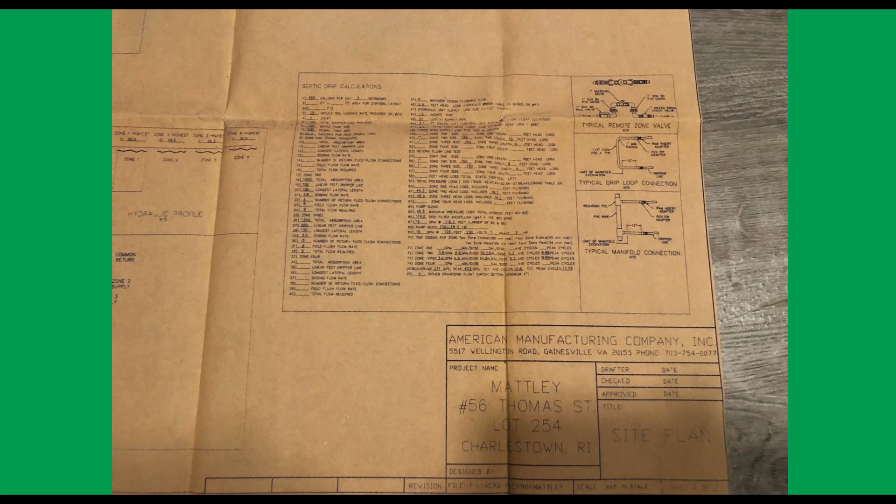So I'm like, I need to go out there. I told the homeowner, absolutely, I'll be out there next week or a couple days. So I went out there, he's quarantined in the house, I have my mask on, and I look at this control panel - it looks very similar to the ones we use today, but the technology, the microprocessors, have been upgraded.

Then I looked at the hydraulic unit - looks very similar to the ones we use today, though some of the valves have changed. So why did the alarm go off? Why did this Perc-Rite system go into alarm?

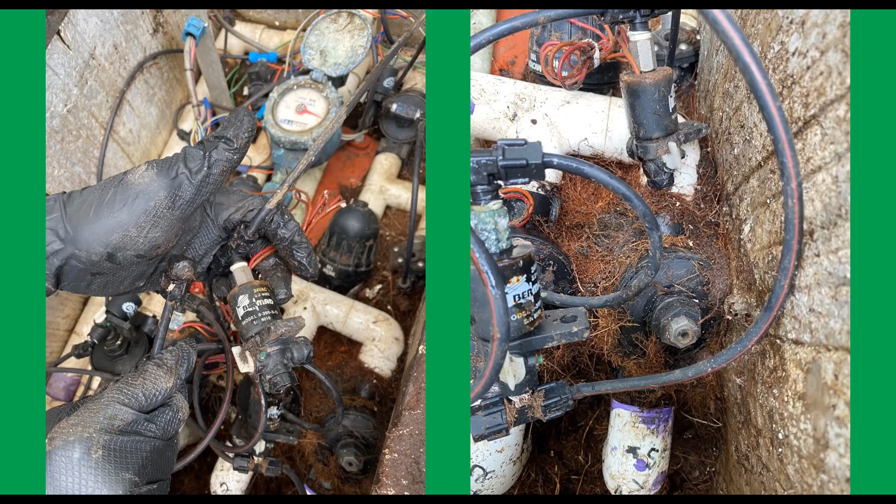The answer is there were critters nesting in it, and they bit off the wires and the hydraulic tubing. This was a 3-zone system, and it kept working because as a critter bit through one zone, it had 2 left to work on. As it bit through the second, it had 1 left. Then when it bit off the last one, the pump had nowhere to go.

So the moral of this story is, every Perc-Rite system installed by Oakson - we have details on our plans to bed the hydraulic unit with stone around it, set the box, and bed stone around the box to create a barrier so critters can't burrow in. Because this one was built without Oakson's oversight, in our experience the critters nested in there and cut all of the wires and the ability for the zones to work.

The end of the story is I had the parts on hand to put it back in operation, and this nice homeowner went on Google - Oakson has a total of 3 reviews, but they're all 5-star. He wrote a nice review saying his system had been running since 1998 with no maintenance, but it's built to last. And that is the end of a Shakespearean tragedy, which turned into a happy ending.